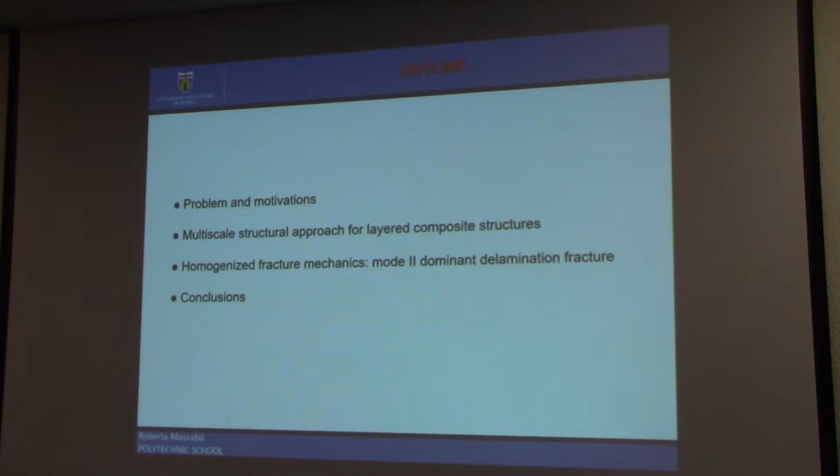Modeling the response, both in the elastic and post-elastic regime, of layered composites is quite challenging for many reasons. I want to point your attention to two reasons: first, the inhomogeneity of the material structure, and second, the fact that the post-elastic regime is dominated by the growth, evolution, and interaction of multiple damage mechanisms. I want to discuss these two points, showing you some diagrams.

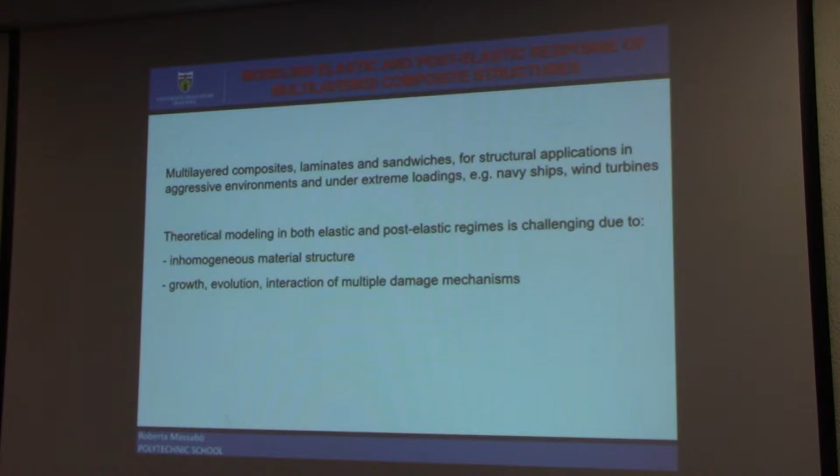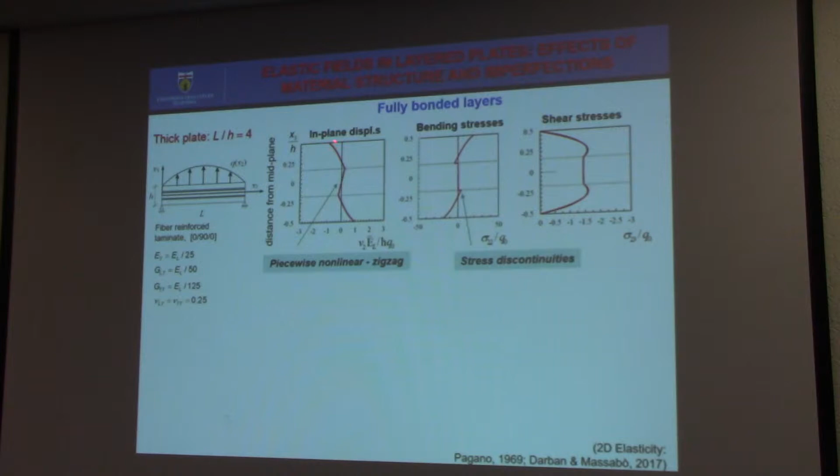Here you see in-plane displacement, bending stresses, and transverse shear stresses in a 3-layer thick plate subjected to a sinusoidal load under plane strain conditions. This is an exact elasticity solution, and the layers are essentially 0, 90, 0 layers. You can see the displacement field is nonlinear and has this well-known zigzag pattern. This tells us that a linear displacement, as given by the classical equivalent single-layer theory, does not describe the response of the actual material. The transverse shear stresses and bending stresses also have this complex distribution.

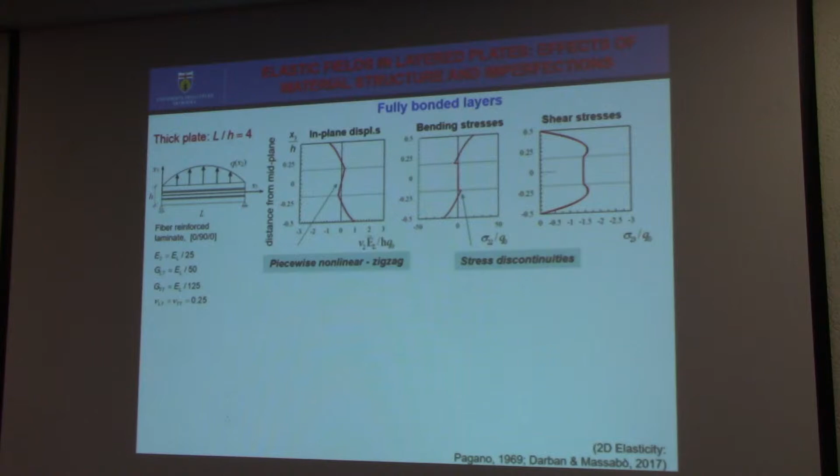If we now account for some imperfection between the layers—this solution was for fully bonded layers—and introduce tangential springs between the layers, linear springs with stiffness K, the response changes substantially. In addition to the zigzag pattern, we also have jumps in the displacement at the layer interfaces, and the shear stresses and bending stresses change substantially. So in the presence of imperfection, the response changes substantially, and we need our model to describe these stresses, because those are the stresses that initiate and condition crack propagation in the system.

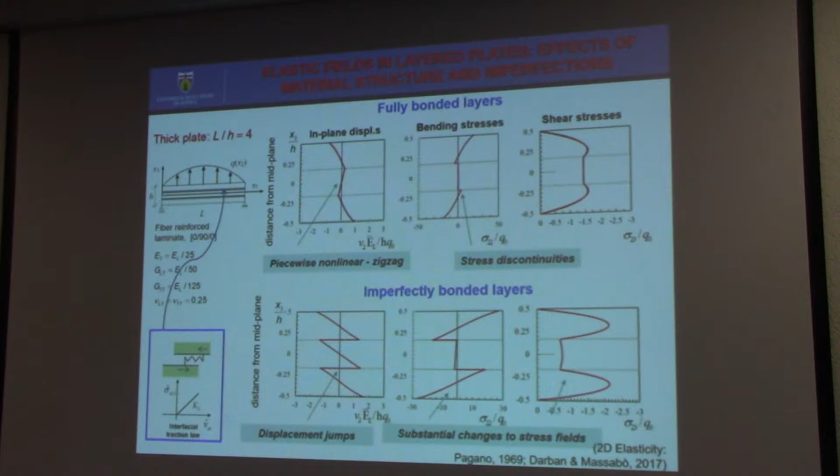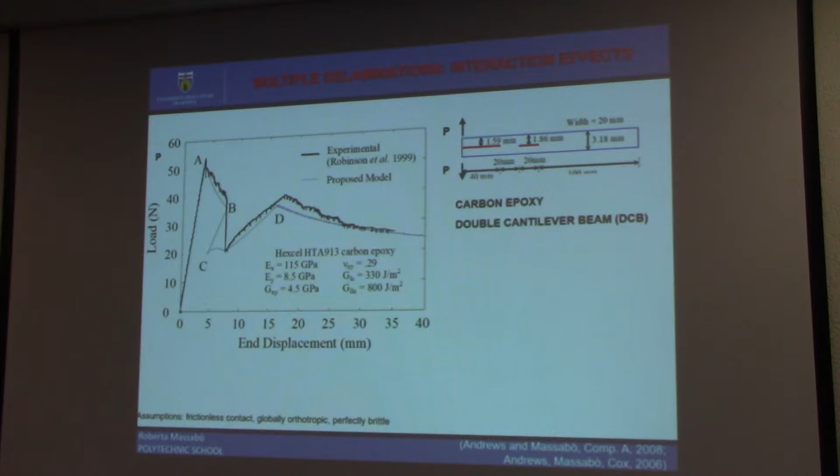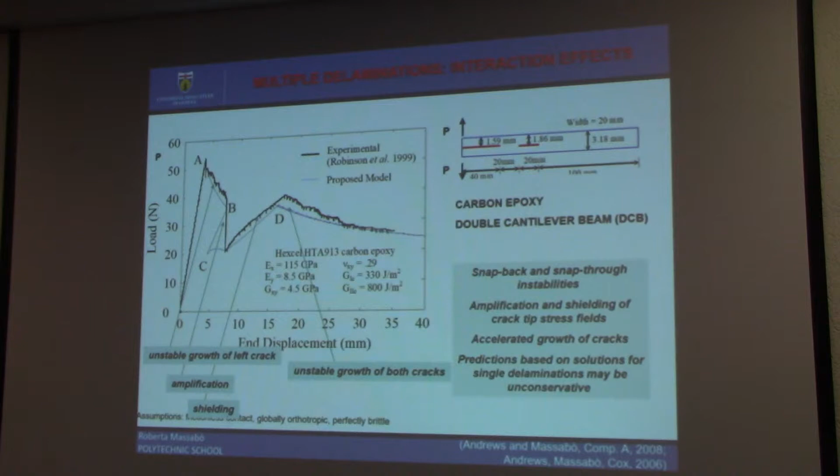Another effect I want to discuss is the interaction of multiple delaminations. This is a load-deflection diagram, the result of experimental tests performed by Robinson many years ago, who tested a double cantilever beam with 2 implanted delaminations. The response has local instabilities, a snapback and a snap-through instability, which are a consequence of the interaction of the delaminations. When the 2 crack tips come close to each other, they interact, and there are important phenomena of amplification and shielding of the local fields. This may generate snapback and snap-through instability, induce accelerated growth of cracks, or even arrest crack propagation. We want our model to be able to predict these kinds of behaviors.

The classical modeling approach to study layered systems in the post-elastic regime is discretizing the structure into thin layers, using cohesive interfaces between the layers to describe the intact regions of the plate and the propagation and evolution of multiple delaminations. This approach has a number of drawbacks. First, we cannot obtain closed-form solutions, just for very simple problems, so we lose the insight of the closed-form solution. The computational modeling is quite cumbersome, and we need very fine meshes to describe the local fields and all the effects I just presented.

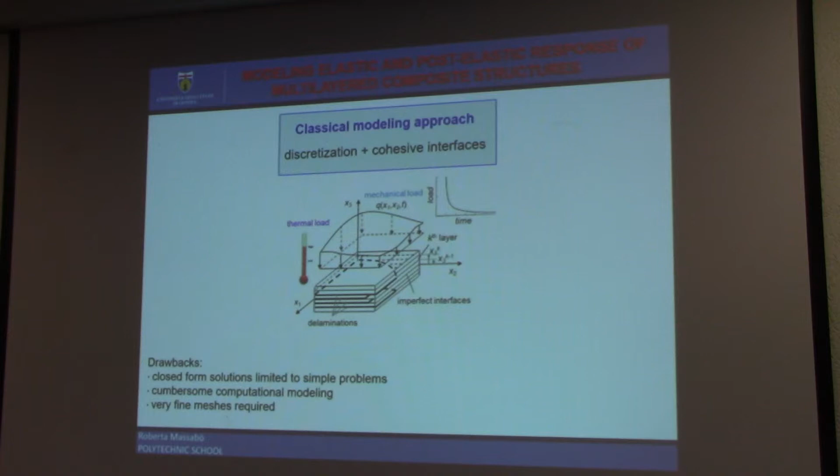So a few years ago, we decided to propose a different approach to analyze layered systems. Our idea is essentially to try and remove the need for a true thickness discretization of the problem. By doing this, we are able to get closed-form solutions for an extended range of problems, and when we implement this approach into a computational model, we also improve the efficiency of the solution.

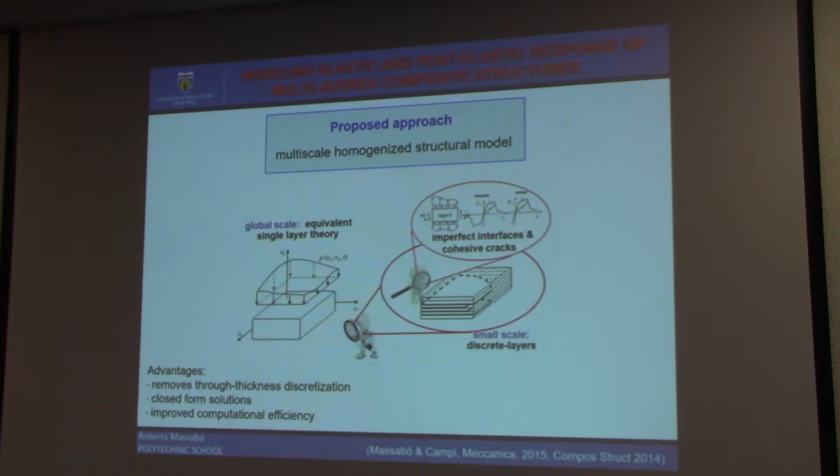Now, these slides summarize our model, which is a multi-scale approach. What we do is couple two different models at two different scales. At the global scale, we consider an equivalent single-layer theory.

We have been using first-order shear deformation theory and first-order shear, first-order normal deformation theory. Both models are described by a limited number of variables, between 3 and 6, depending on the geometry and the assumptions you make. These models are well known in the literature, and they can describe the global response of the layered plate nicely.

But obviously, they cannot describe the local fields and the phenomena I showed you before. So to describe those fields, we use a local model. At the local scale, we use a very classical discrete layer cohesive crack model.

In this model, we discretize the plates into layers, and we introduce cohesive interfaces, which are governed by a cohesive traction law. Obviously, this model has a large number of variables, which depend on the number of layers.

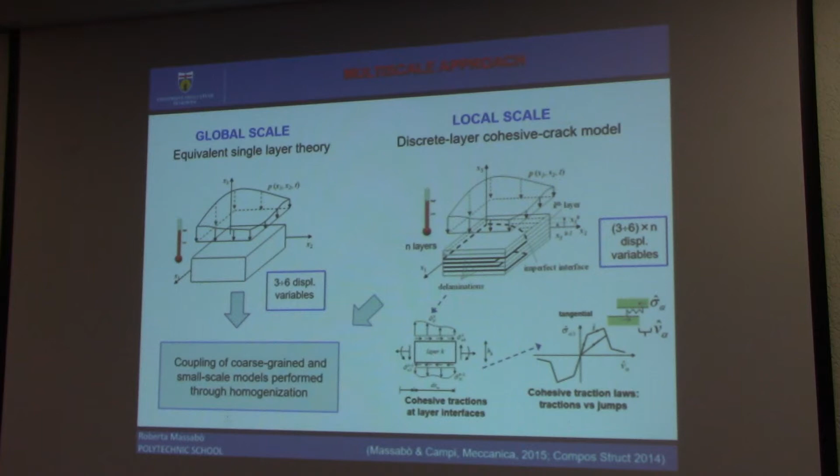So the idea is to couple these two models using a homogenization technique in order to obtain the small-scale variables as a function of the global variables. Then we can apply a variational technique, and then we will obtain the equilibrium equation of the problem, which is in terms of the global variables only.

Now, I'm not going to show you the mathematical detail, given the time of the day. I just want to focus a little bit more on the main assumption of our model. We essentially extended the original theory developed by Di Sciuva, the zigzag theory, for fully bonded layered plates. The idea is shown here.

This is a 4-layer system, and this is the zigzag displacement field. We assume that the displacement field is described by these 3 different contributions. The global field, which is the field of our global model, the coarse-grained model, so equivalent single-layer theory.

And then we add some local perturbation, a piecewise linear field in order to describe the zigzag behavior and the inhomogeneous material structure, and a discontinuous field with jumps at the layer interfaces to account for the presence of delamination and imperfect interfaces.

Obviously, the number of variables is very large, but as I said, we can use a homogenization technique, and what we do is impose continuity of normal and shear tractions at the layer interfaces. By doing this, we can obtain the local variables as a function of the global variables.

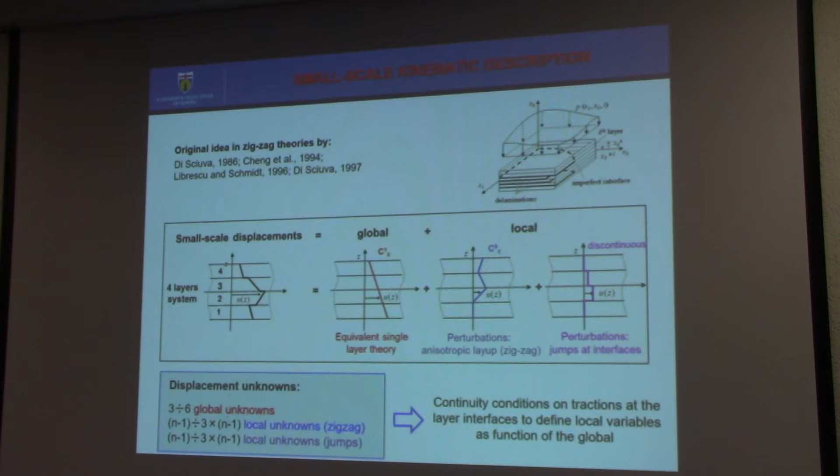Then we use a variational technique, and we get the equation of the problem, the equilibrium equation. I'm skipping all the equations for the sake of time, but I can show them later if you're interested. So this is to show you how the model works.

So I reproduce with our homogenized model the plate I discussed before. It's a 3-layer thick plate with a 0-90-0 layup. Here you see in-plane displacement, shear stresses and bending stresses.

The first row is the fully bonded layer. The last row is the fully debonded layer, so all layers are fully debonded. This intermediate row is a partial bonding between the layers.

You see how well the model reproduces the zigzag pattern in the displacement, the jumps at the layer interfaces, and how well it also reproduces the complex stress distribution, transverse shears, and bending stresses. And we can do this with just 3 displacement variables.

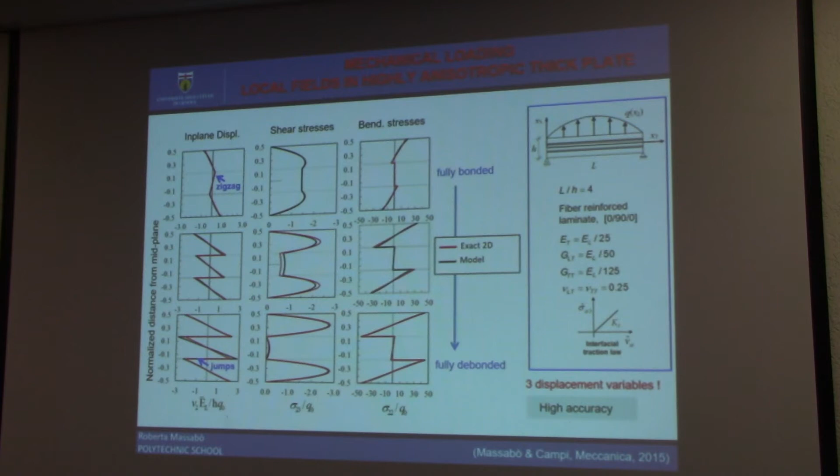So essentially, to solve this problem, we are using equations which are similar to Timoshenko beam theory. So just a very simple equation that we can solve in closed form and get this kind of behavior. And here is another example.

Now, the idea is to extend this approach in order to analyze delamination evolution in the system. The focus of my presentation today is only on mode 2 dominant fracture problems, on a problem in cylindrical bending or beam problems. We are therefore assuming the interfaces to be just sliding interfaces.

So this is a layered beam with many delaminations and many layers. The layers are joined by cohesive interfaces, and we use this cohesive interface traction law in order to describe both the intact part of the specimen and the delaminated part.

We apply our homogenization technique, and this is the equivalent homogenized beam, in which, as you can see, we don't have any need to discretize in the through-thickness direction. Each region of this beam will be described by the equilibrium equation we derived before, and we have a closed-form solution for each portion of the beam.

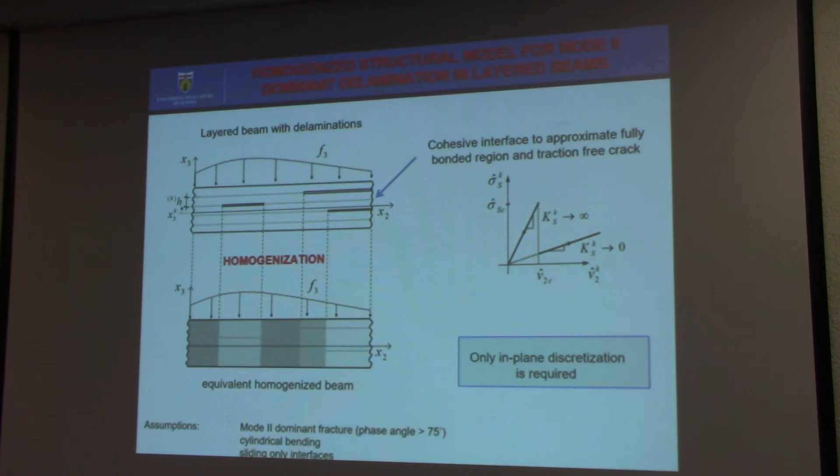Let me show you an application of this idea. This is an application of the model to a unidirectionally reinforced ENF specimen. The material is essentially homogeneous, and we have a crack at mid-thickness.

We homogenize the model, and this is the homogenized beam. We derive in closed form the energy release rate, the mode 2 energy release rate, and this is the equation we get. This is the same solution we would get using a structural mechanics approach, a classical discrete layer model.

The solution captures the dominant terms of the exact elasticity solution. What is missing here are additional terms, which are less important because they are either constant or a linear function of the crack length. So they matter only for short and intermediate crack lengths, due to near-tip deformations, which are neglected in the homogeneous material in our model.

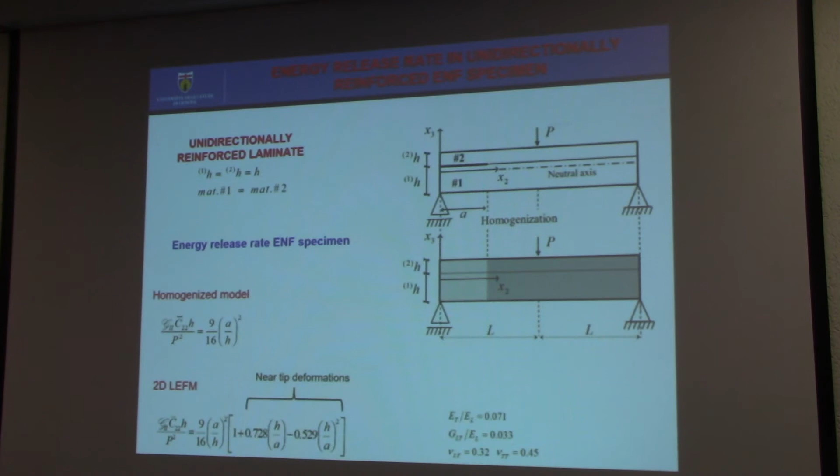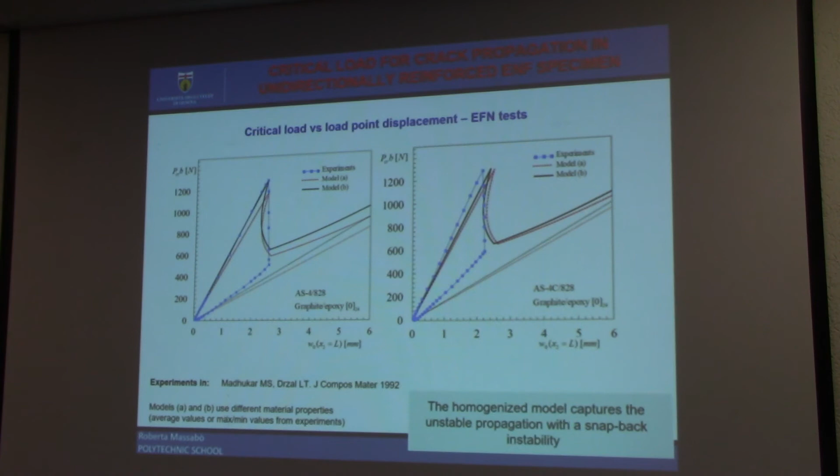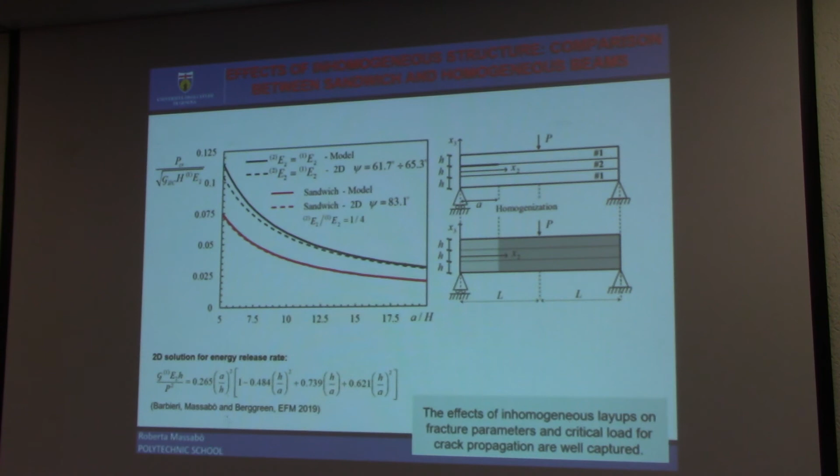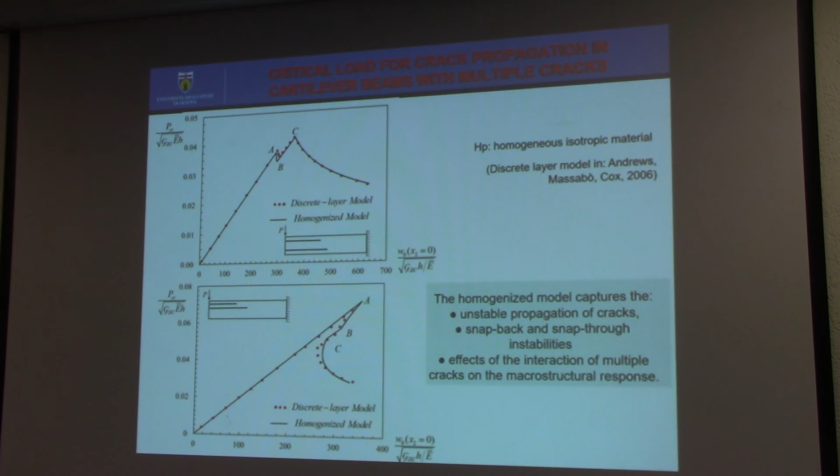As you can see, we are even able to follow the evolution of the crack and predict the interaction between cracks, again using a model which has no need for through-thickness discretization, with equations very similar to those of beam theory.

We have been using a homogenized structural model to study mode 2 dominant delamination fracture in layered beams. The delaminated beam is modeled as an equivalent homogenized beam, so we have no need for through-thickness discretization of the problem. The energy release rate can be defined in closed form for a number of problems.

The model is able to capture the effect of the multi-layer structure on energy release rate and critical load, and is able to follow the unstable propagation of the crack to predict local instabilities and the effect of the interaction of multiple cracks. Thank you.